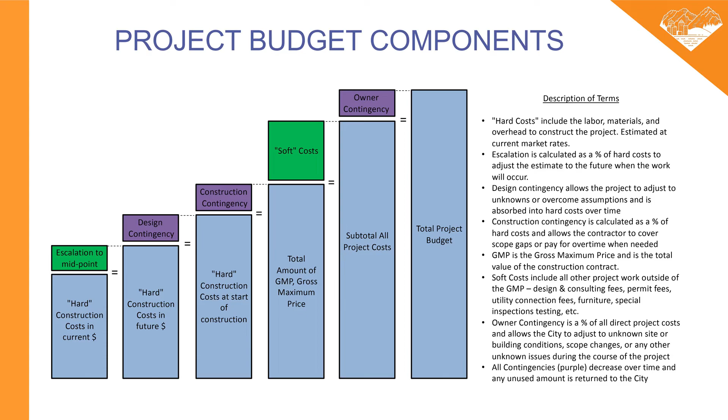So it takes a lot of effort to dissect comparative costs to other projects. You really have to know which one of these you're talking about to make an apples to apples comparison, okay? It takes a lot of effort, we put a lot of time into it. When we present data to you, we want to be really clear about which number we're talking about, so you have the full picture.

The couple other things I want to point out is budgeting and estimating is an iterative process. The reality of our budget is probably going to go up, down, up, down, up, down for each cost estimate. As we estimate a scheme, we realize, oh, that's too much, or that's not working, and then we're going to make some new choices and different designs to make sure that we're trying to get this into a budget where it needs to be.

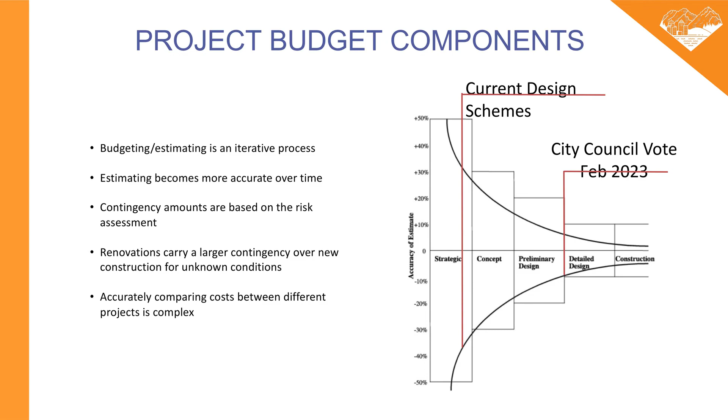The other thing I want to do is a quick update of some work we've done so far and what the next steps are. So Chris mentioned we interviewed our CMGC. Who knows what CMGC stands for? Yes? Construction Manager General Contractor. That's right, good job, gold star. We're going to use the term CMGC and contractor interchangeably because it means the same thing, okay?

So we had our interviews. We should figure out who has the best score, and that's this week. And that's going to go to the City Council in November to approve their contract to start.

We have a preliminary hazardous material assessment complete, covering asbestos, lead, and mold. What we have to do next is analyze it and figure out what that means for renovating the buildings, and start to understand the difficulty and cost of remediating those things. We also have to see if we need more testing or more information from that preliminary assessment. We think so, but we don't know yet.

We've also looked at the foundations and the concrete. We did a visual inspection where you can see parts of it are chipped away and gone, and we did a hammer test, which is a non-destructive test. The next step is to take some core samples and try to locate rebar. For the Quonset Hut, we don't have any information on the foundation, so we won't know unless we go in and start drilling a bunch of holes.

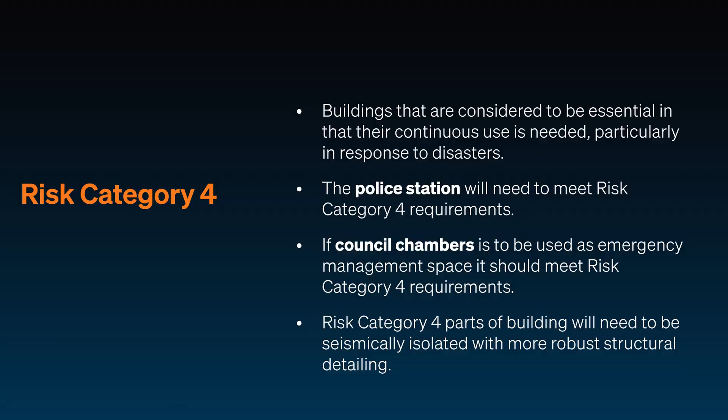We're going to show you three schemes, as Layla said at the beginning. Then we're going to ask you guys to talk about them together and discuss pros and cons for each scheme.

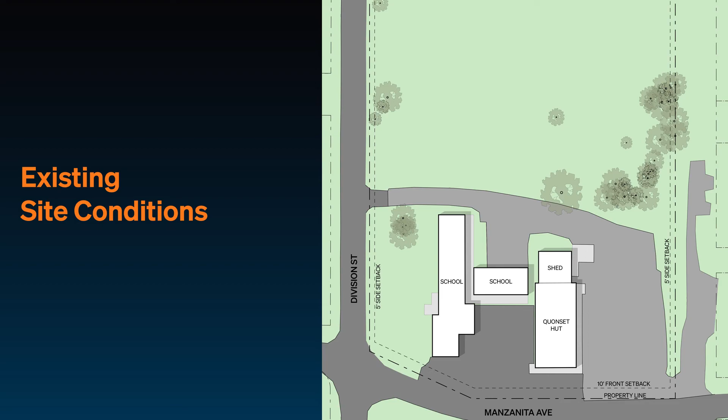But we also want to talk a little bit about the whole site. This came up a lot last time: our building doesn't really need much more than a third of the site. Depending on how we configure it, it might grow a little bit, it might shrink a little bit.

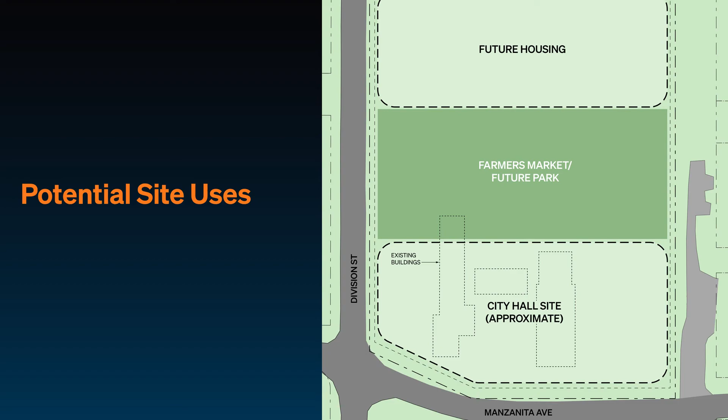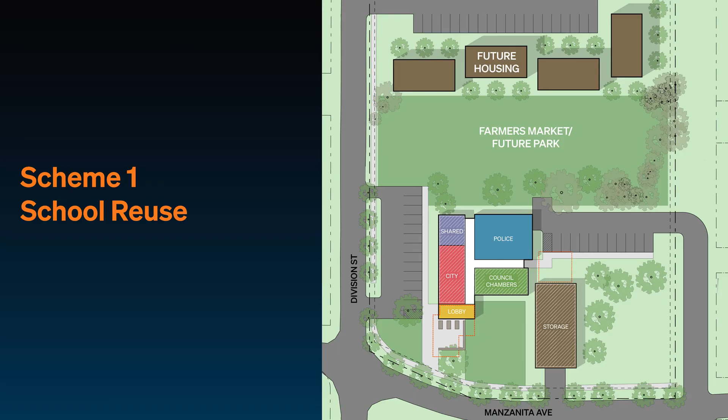And then we keep the Quonset Hut on the side, right? So we're really reusing almost all the school and the Quonset Hut. The dashed lines you can see here, zoom in, are what we're demoing in this scheme: the little lean-to off the back of the Quonset Hut, and the front part of the school.

Which presents some problems to us from an accessibility standpoint. This floor is 2 feet below the other floors. In order to get down there and follow ADA, we're going to need 24 feet of ramp plus landing, so we're talking about 30 linear feet at least of space. So we determined that maybe we can just lop that head off, put the lobby at the end here.

And we get a kind of U-shaped scheme with a green space or plaza out front. The other piece that's important is the code is going to require us to have, we believe, 23 or 24 parking spaces. We're splitting that pretty evenly between what we're calling staff and police, and public. Based on our conversations with the city and the police department, this kind of division makes sense.

The city folks kind of like the idea that the lobby can oversee, or at least see, the parking lot that is for the public. A couple other things to mention about how we've thought about the layouts: the lobby is going to be staffed by a city employee. We're not going to have a full-time person whose job it is to sit in the lobby, so that adjacency to the city offices needs to be right next to it. They need to be able to go back and forth easily and not feel isolated from the rest of the staff.

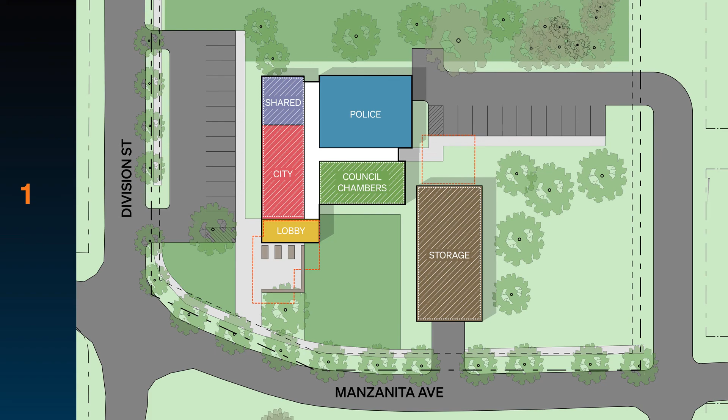So, pros and cons—I'm going to throw out a few for each one. I'm trying not to put our finger on the scale too much here, just a couple things to get you guys thinking about this. So pros: it reuses the bulk of the school, it keeps the Quonset Hut for storage, and I think it makes a pretty nice public space out here, kind of a gracious entry to this new facility.

Some of the cons: compared to some of the other schemes, it uses a bit more of the site, and as a result of all this space out front, there's going to be more site work involved. So there's a potential cost to that.

And then, we've got all of this square footage, which is about our 6,000-ish square foot building. But we've also kept the Quonset Hut in play, which on the one hand is great. On the other hand, are we going to do nothing to that in this scheme, or are we going to have to renovate it in addition to this? So that's just something to think about.

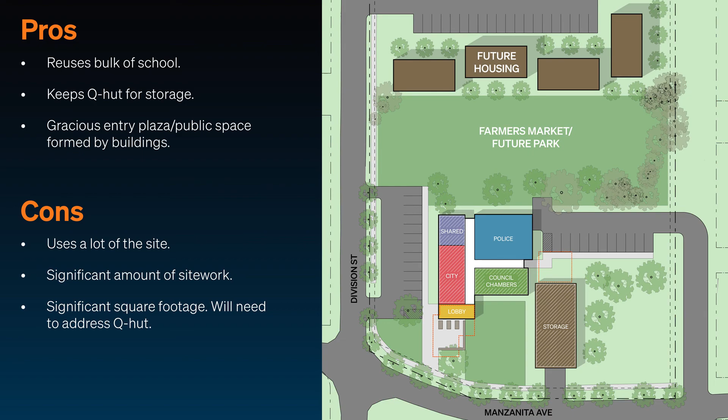Scheme 2, Quonset Hut scheme. In this scheme, you'll see it's a little more compact, a little more tucked up Manzanita Avenue. Rather than reuse the school and the Quonset Hut, it's really just reusing the Quonset Hut. That gives us a bit more site to work with when we're done.

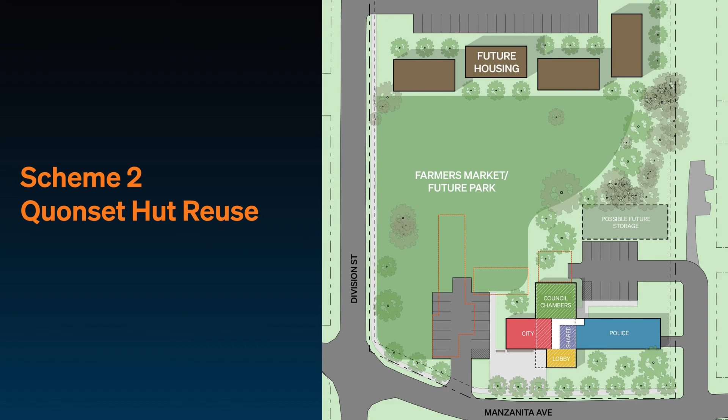It puts the city and the police as wings coming off that Quonset Hut. Again, the same kind of relationship here, where we have our lobby adjacent to or close to the city, close to the police. There's some shared space as well. What we like about this is we get to start to take advantage of that great tall space within the Quonset Hut for the city council chambers.

In this case, we'd probably use that council chambers and the lobby to really take advantage of that height. In the interior, we might drop some ceilings in order to reduce the volume. But again, our pros and cons, not yours: we're reusing the Quonset Hut, and we've got a lot of site for future development—a much larger site footprint left.

This takes advantage of the existing tall, beautiful space in the Quonset Hut. On the con side, we've lost our storage, so we'll have to redevelop some storage on the site eventually. There's some complexity in dealing with this structure to bring it up to code, particularly as we plug into it with other volumes. On this side it's not so terrible, but on this side where we'll need a seismic joint, that's going to be more complex. These are all things we're weighing as we look at the options.

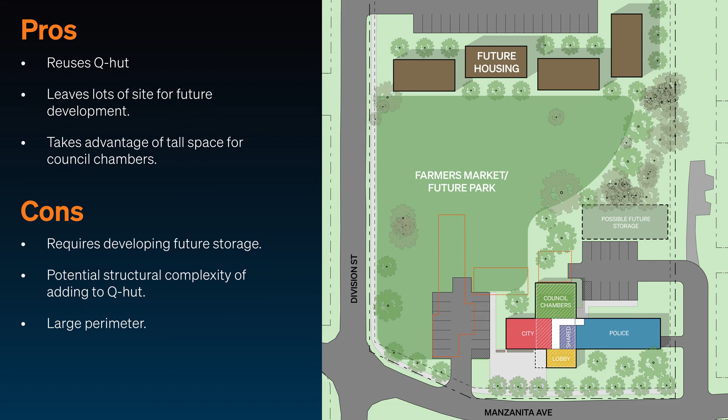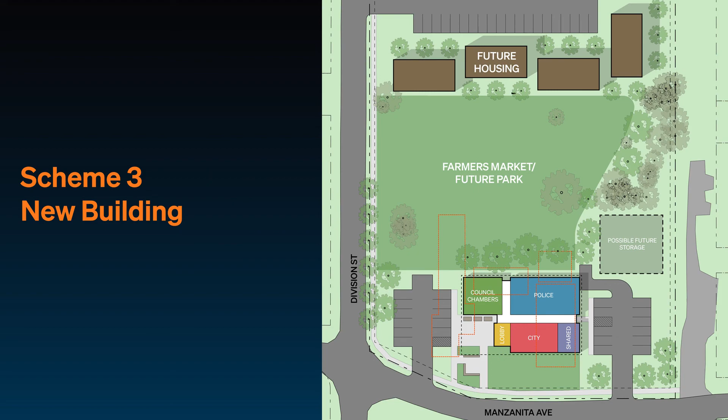The third scheme is a fully new scheme. In this case, we've got a fair amount of site left over. Again, we've left the future housing the same in each case, a little more compact into the street. The entry point is more on the corner, perhaps, with the lobby shared by the city and the police, and council chambers. Parking is public on the west, staff and police on the east.

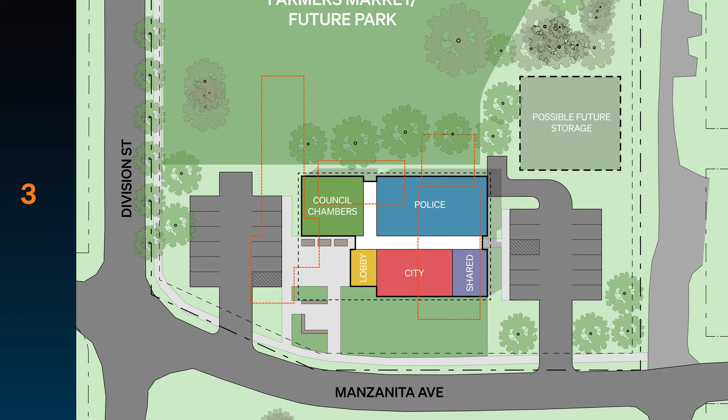The pros in our mind for this is it's fairly compact, right? We can make this footprint as efficient as we can, because we're not fitting program into an existing footprint. As a result, we get a pretty nice, efficient perimeter to this building.

Cons: it requires developing future storage. There's more demolition, and the reuse of these buildings becomes limited to salvaging materials and reusing them if we can in this facility. So those are our three schemes.

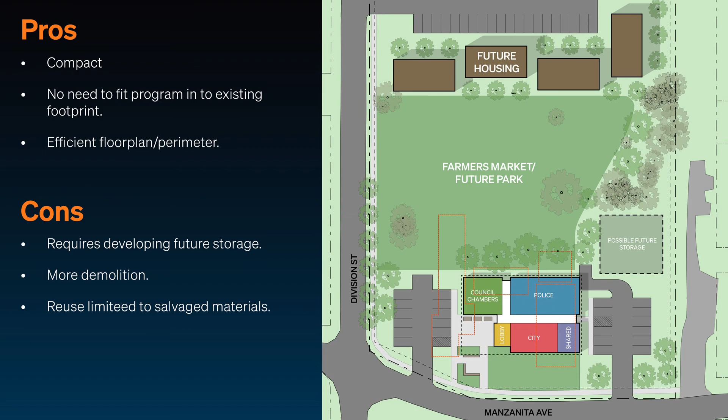One question is the white that appears in each drawing—are those enclosed spaces? Are you talking about the white hatch in each of the three drawings? Yeah, they are enclosed. They're essentially interior corridors. Again, if you think it should be exterior, that's the kind of feedback we want to hear.

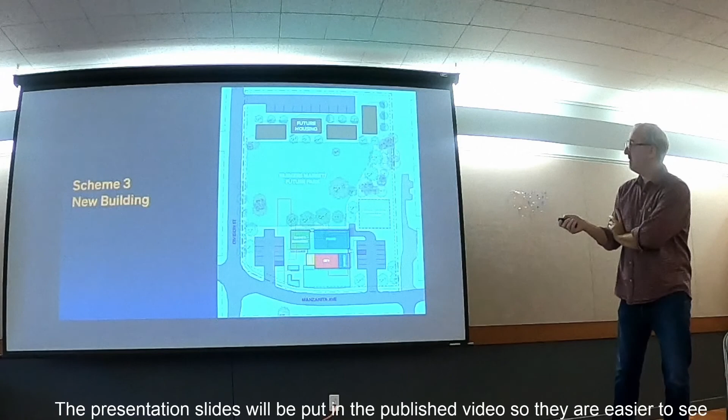Can you make a general statement about what evaluation has already been done on the existing buildings previously? Sure, I'll go back to Jesse's slide. We're waiting on our geotechnical report—they've done their boring, so we're going to find out a lot about how good or bad our soils are. There was a report done in 2018 that did a structural assessment of the buildings, and another report done in February of '22, which was another evaluation of the foundations. We've just gotten our first draft of the hazmat report, which will help us understand how bad the mold problem is and how much asbestos there is.

This level of evaluation hasn't been done before—to my knowledge only the 2018 structural report exists, but we've done a lot more since. As Jesse mentioned, we're planning on doing more because, for example, we have no information about the slab at the Quonset Hut. We don't know the concrete mix and rebar requirements, which in the 50s were very different than they are now. Depending on our geotechnical report, that may be a big problem or it may not be. So that's what we're starting to sort through.

On the maps, when you talk about additional or future storage space—any one of those—I take it that's not the 600 square feet of secure garage? Correct, that's not part of this project.

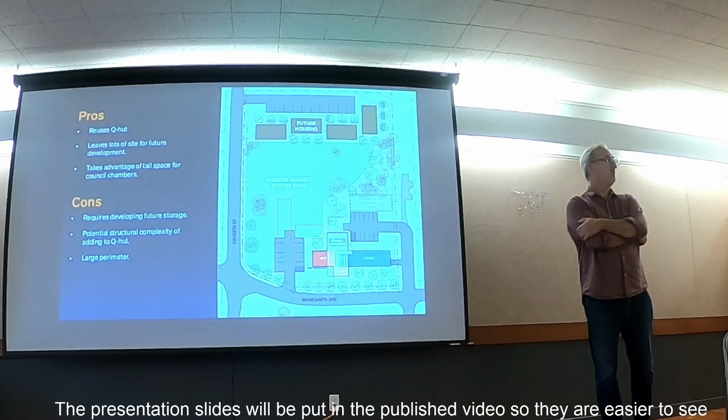Okay, what level of construction does that have to meet? 1 through 4? Technically, it depends on what you're parking. If you're parking emergency vehicles in it, it's going to want to be risk category 4. I just want to be clear, that's not part of our project. What it is part of is the larger site plan. So what we're doing is reserving future space for that, should we determine we need to build a facility to house materials there. So then we're talking about storage primarily for the police department, is that correct?

No. That storage will be built currently into here. We have a number of emergency management supplies. Those are all stored in Connex boxes, which can be stored outside. They're currently residing in the Q Hut, but we wanted to look at the site as a whole and see if there's opportunity to build a facility on site at another phase of the project. In the schemes, it's sort of a dotted line relationship because it's not part of City Hall. It has nothing to do with our police facility. That's its own piece.

And it's not included in the square footage of the building then, the 6,000? There's a 600 square foot secure garage for the police for storage and for their vehicles, and that is included.

Okay, that leads to one more question then. When do you anticipate the cost for that storage facility that has to be provided is going to occur, and what timeline? I don't know. It's on the horizon, but that would be something city council would determine whether or not it's a priority. So right now the focus is on this. We have other places to store that material, and like I said, it's all in Connex boxes, which can be stored outside.

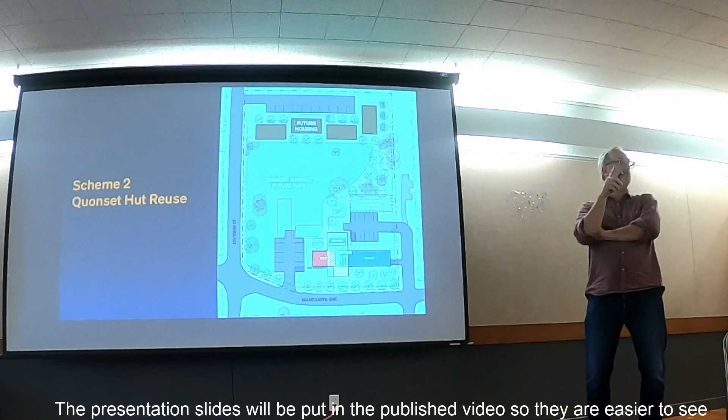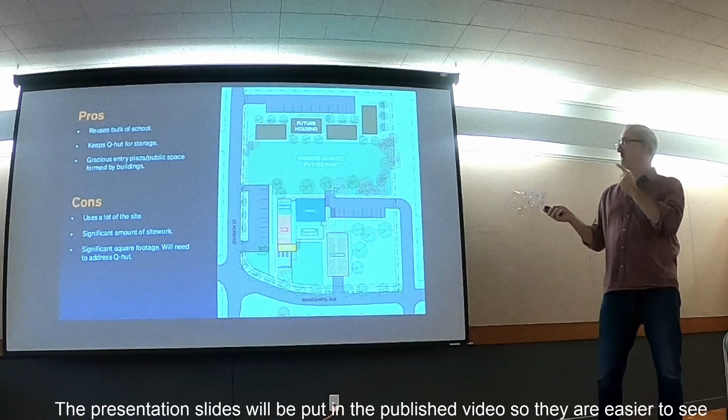Go ahead. Scheme number one, the police is all brand new construction, correct? Correct, every scheme. And each scheme, the police, because of that, we've put the police outside of the existing footprint of existing buildings because of the risk category.

And to that point, if you were just analyzing new construction only, do you have any rough order of magnitude of the increase to go from risk category 1 to 2, from 2 to 4 in types of construction? I can't provide that for you right now. We're going to get into that with our general contractor once they're on board, but that ties directly into your final design.

Absolutely, and I think the question of whether or not we're taking just the police facility to a risk category, or the rest, that will be part of the evaluation, part of the analysis. If it's 10%, it might be, let's build a really nice one. I think that is going to be part of this process. At 50%, then you're saying, right, and if we are separated, then we need seismic joints, which complicates things. So as Jesse was trying to say earlier, I think we're going to be getting into the weeds as we get further along here, but I wanted to introduce the topic now because I think it's important that they're evaluating where we are.

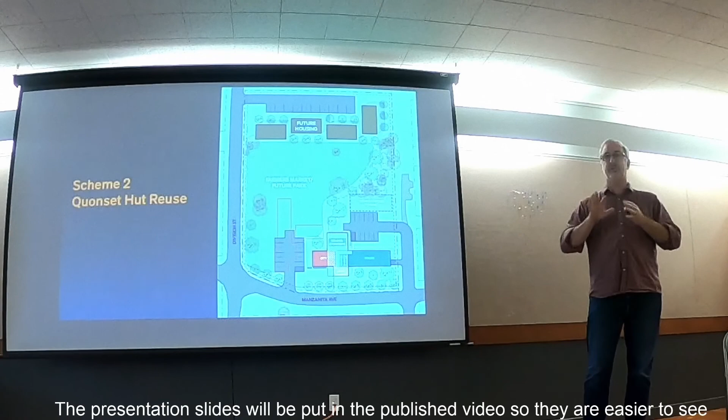Anybody else? I have two questions I'm curious about. One is all of the designs are in the same site, that big area, and I'm wondering why you did that—I can understand if you're reusing the buildings. And the other question is, are you considering solar energy?

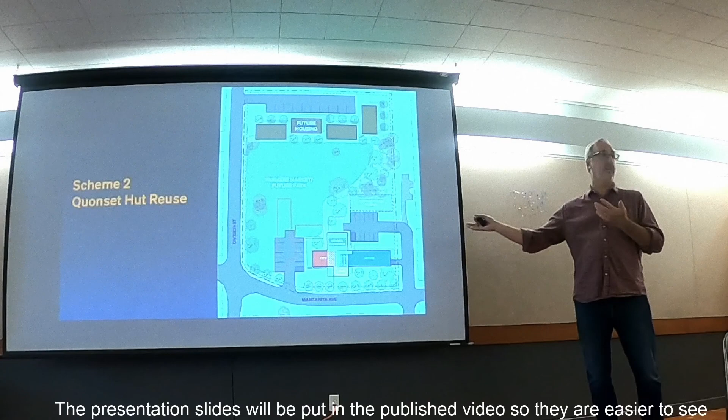Okay, first part of the question, the reason we're showing them on the part of the site that we're showing, I think is twofold. One is, truthfully, the first two schemes obviously need to be there because of the existing buildings. But it's also where our utilities currently live, so we're trying to be efficient about site work. And I think there's a sense that Manzanita Avenue is probably a better front door for this facility than somewhere up on Division. So that's kind of where that decision was made.

But again, this is the kind of feedback that we're interested in. If there are people here that really think it ought to be on Division, we want to hear that. The solar question is an unknown at this point.

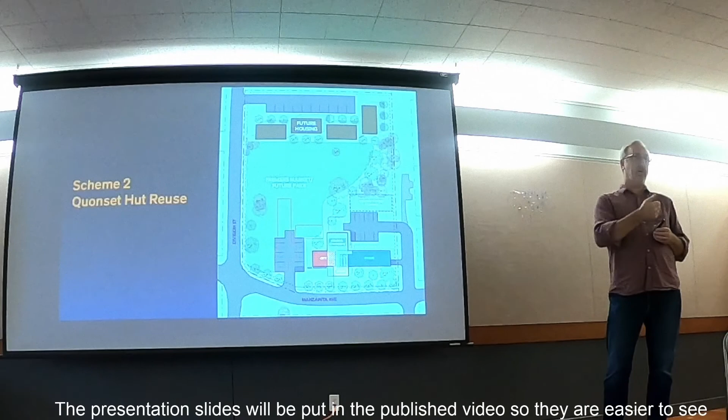It's going to be part of the design process, part of the cost estimating process. I think once we dial into a scheme we're more comfortable with, as we get to one or two schemes we're carrying, we want to start having conversations about priorities, because we're not going to be able to do everything from a sustainable standpoint. So what matters? Is it water, is it solar, is it something else? We're going to hopefully go through that process with you all as well. So TBD, I guess, is the answer.

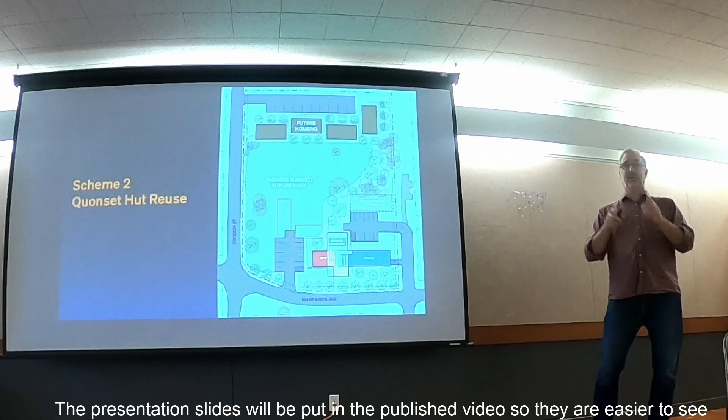I guess I was unclear as to whether in scheme one, with the use of the Quonset as storage, that requirement is being met, but it's not being met, at least currently, in scheme 2 and 3. Right, so it's not given to us as a requirement to have the storage, but by reusing the building in this way, we don't need to tear this down. You can do this very same scheme and take this away if you wanted to.

There's going to be a cost evaluation as to if we're going to build this beautiful new facility here. My gut is we're going to have to put some money into the Quonset Hut too, or else it's going to feel very disjointed. We'll start to see what those numbers are and then decide what its value is if this is our scheme.

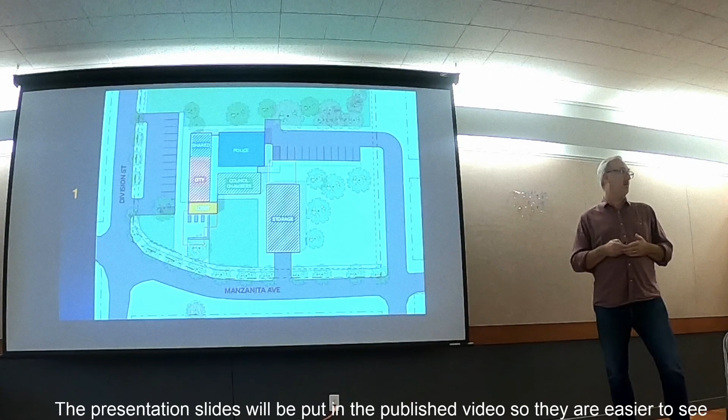Do you have other examples of how Quonset huts have been used in other places? I'm just wondering the potential of a Quonset hut — it doesn't look that great looking at it now. Not at the moment, no. We can certainly bring some next time.

What I would say about the Quonset hut, and again this is the architect walking into that space, is it's pretty great space, right? And it's a space that we're not going to build if we're doing all new construction, because it doesn't make sense to build that for this program type. So if we think there's enough value there, and if it's manageable from a cost standpoint, we love the idea of taking advantage of that space — it could be an amazing city council chamber. But like everything, there's lots of trade-offs.

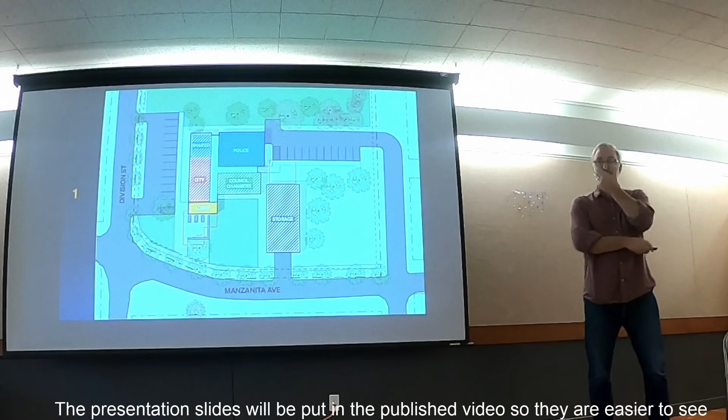How do we know as a group in our evaluation today whether the Quonset hut is even worth salvaging? It's 50 years old or more, and we're talking about building something that we want to last for 50 years in the future. Is it worth considering? I don't know, as a citizen, is it worth considering the Quonset hut for another 50 years? Like, why would we consider option 2?

Well, I think that's kind of our million dollar question here. There's definitely interest, it seems to us in the community, to reuse these buildings. What we're trying to do is facilitate a process that gets us to a conclusion where there's some consensus around that. I think there's a lot of unknowns with the existing buildings, and costs associated with those unknowns — we're going to go through the process to try to reduce and know those unknowns as best we can. So I guess my answer, maybe unsatisfying, is: if you think there's inherent value in that building worth saving, it's all trade-offs. We're going to maybe put more money into that than we would put into something else, but we get that space, we get to reuse that building. It's really a value judgment at some point, and we're going to give you numbers along the way to help you weigh those things.

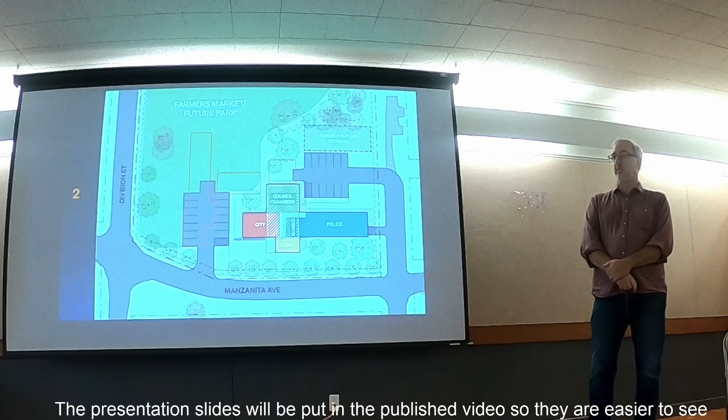I feel strongly that we have the wrong location for all of this, and it should be located on Division. How do I articulate this in 1, 2, and 3? I think those are cons. Yeah, those are cons. You should talk about that in a group and write it down — it'll be good feedback, it'll be great. That's exactly the kind of stuff we're trying to solicit here, because that's not something we've heard yet, and if that becomes the consensus, then we're going to start moving these things around.